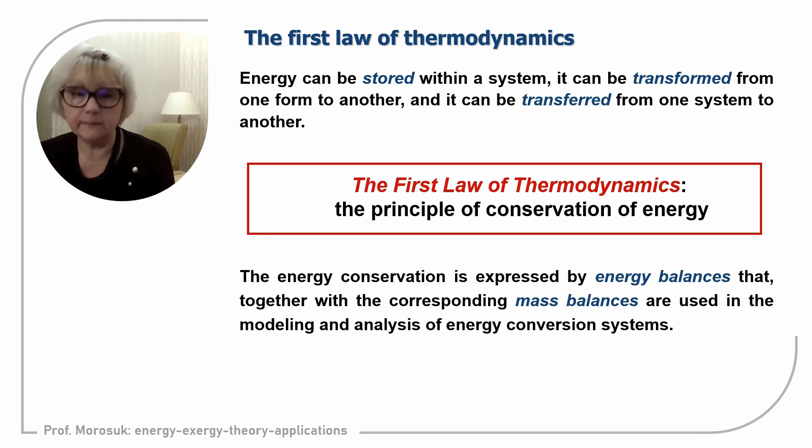In the previous lecture, we already covered energy balance for the open system. Now we will discuss the energy balance for the closed system. For engineering thermodynamics, the closed system is associated for us with the cycle. And we already discussed the definition of cycle. If a system goes from one initial state through a series of processes and returns to the same state, we have a cycle. And depending on the direction of the processes, all cycles are divided into two big categories: direct cycles and inverse cycles.

And the word direct or inverse is mainly associated with the direction of the cycle in thermodynamic diagrams. For example, here we have the TS thermodynamic diagram. And for the mass balance of the closed cycle, mass is constant because according to the definition of closed system, matter, so working fluid, cannot cross the system boundary.

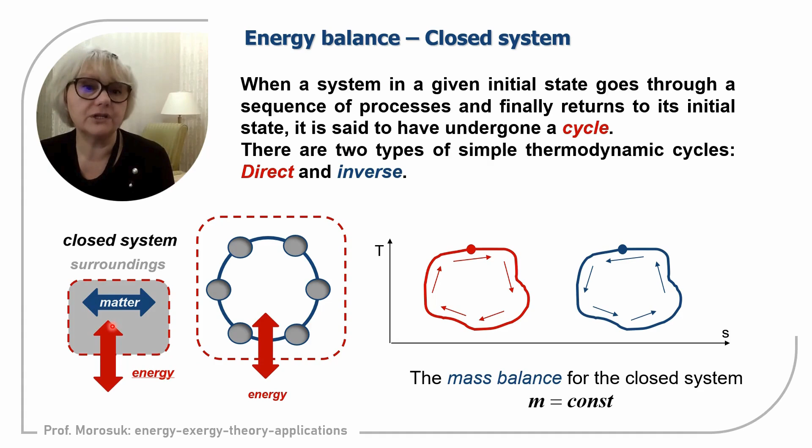According to the energy balance of the closed system, so it is a cycle, if the system returns to its initial state after passing a set of processes, the net change in energy is equal to 0. So it means that the balance is written like that: work of the cycle plus heat of the cycle is equal to 0. So it is a well-known equation. Now let us discuss each term.

What does work of the cycle mean? Work of the cycle is the sum of all works supplied to the cycle and rejected from the cycle, or better to say work applied to the cycle and work produced within the cycle. Similarly, we can discuss heat of the cycle: all heat transfers to the cycle minus all heat transfers from the cycle. And we can show it graphically.

So let us assume that we have a cumulative stream of all work supplied, all works produced, all heat. Heat or heat rates, or instead of work we can also say power, does not matter now. For us both are okay, and all heat transferred through the system boundary. If we are absolutely precise with thermodynamic terminology, of course, it will be energy transfer in form of work and energy transfer in form of thermal energy.

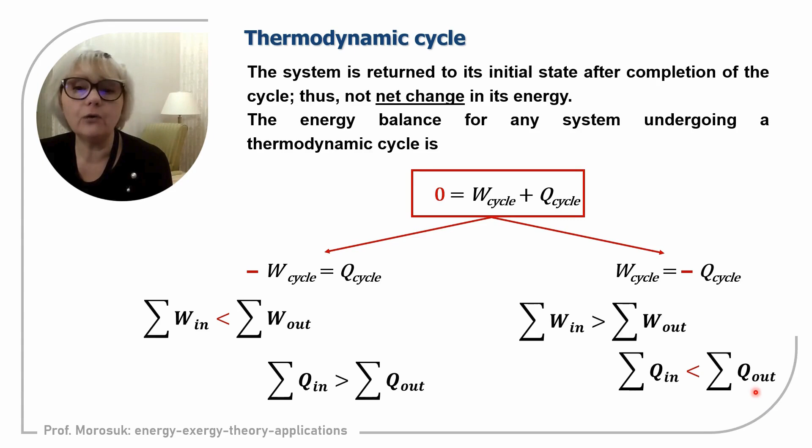This is the first case. In the second case, work supplied is higher than work produced by the cycle or removed from the cycle, but we have minus heat, energy in form of thermal energy. Heat supplied is less than heat rejected. So now, how will it affect the configuration of cycles and the analysis of the cycles?

Again, the same equation. If work of the cycle is negative, as we already agreed, according to the European rule, energy transfer coming from the system means that it is produced within the system. So work is negative means that within the system, work is produced. And this is the effect of the closed cycle. But heat of the cycle is positive.

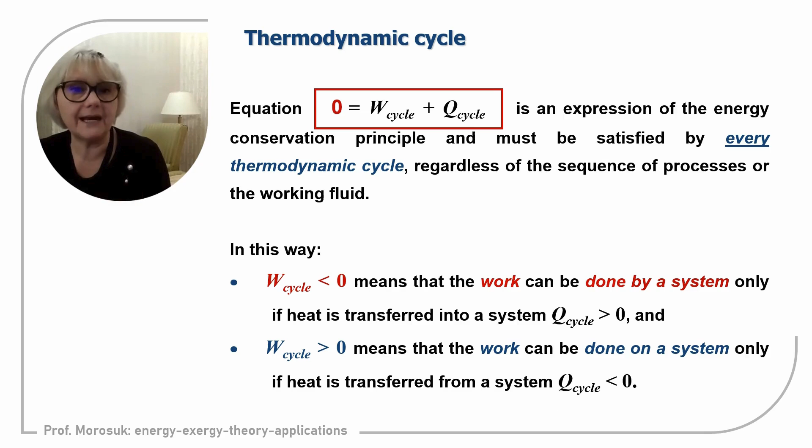If work of the cycle is positive, it means that for the realization of the cycle, work should be supplied. Maybe something is also produced, but nevertheless the work supplied will be higher than the work produced by the cycle and removed from the cycle. And heat of the cycle is negative. It means that we will supply less heat than we will reject from the cycle.

Let us remember the 4 blocks when we discussed engineering. We had energy transfer, working substances, thermal design, after that engineering design and operation. Now we will discuss thermodynamic cycles. Operation and engineering design are not interesting for us because it's only the thermodynamic concept of the cycle, and at present working substances or working fluids are also not included in the discussion. So thermal design and all our thermodynamic discussions will be limited only to the block energy.

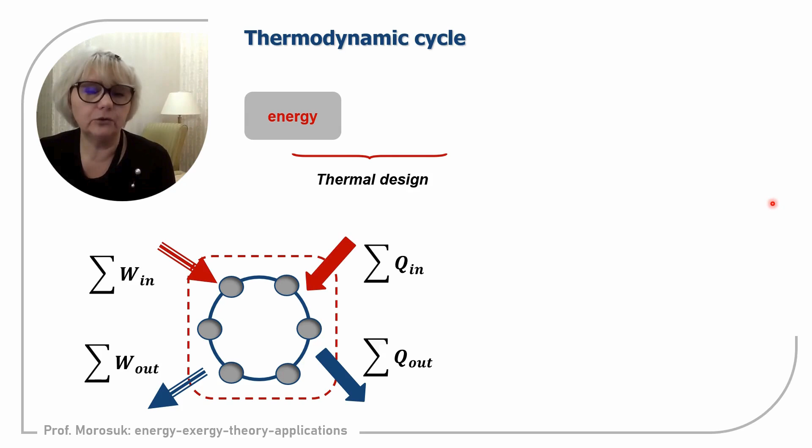So now the only interest for us is how heat is supplied to the cycle and rejected from the cycle, work supplied and work rejected, meaning work produced within the cycle. Work is more or less clear for us because work is only work, and there are no other categories that should be discussed behind the work. But heat is always associated with transfer of thermal energy. For heat we need not only the amount of heat but also the temperature level at which heat transfer is taking place.

And in thermodynamics, there is a concept of thermal reservoir. It is an absolutely theoretical concept. In real life, thermal reservoirs don't exist. And we need to introduce this concept for thermodynamic analysis of the cycle. So a thermal reservoir is a special kind of hypothetical closed thermodynamic system.

And what do we know about a thermal reservoir? The temperature of a thermal reservoir is always constant, regardless how much energy we take from this reservoir or how much energy we reject to this reservoir. It will not affect the temperature. Temperature always will be constant. It means that this thermal reservoir is of huge size.

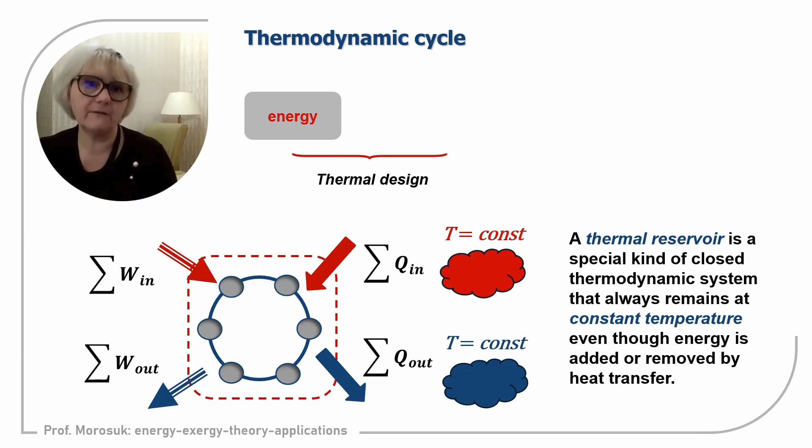So we will discuss two thermal reservoirs. One in red color always will be associated for us with higher temperature, and blue color will be associated with lower temperature. Here I would like to bring your attention. We will not discuss hot reservoir or cold reservoir. We always will discuss only relatively hotter and colder. This is very important for us. So now we will deal with thermal reservoirs.

The only thermal reservoir that is more or less close to real life, and we can understand what it is, is the environment. Many years ago, people assumed that regardless how much energy we reject to or take from the environment, its temperature will always be constant. After the Paris Agreement and all these environmental issues, we know that unfortunately the temperature of the real environment, which is called surroundings in thermodynamics, is not constant and is continuously growing. So even the surroundings cannot be assumed to be an ideal thermal reservoir. Okay, this is real application, and now we will return to thermodynamic analysis.

Let us assume that we have a thermodynamic closed system. Temperature of this system is constant, and this temperature will be the temperature of the environment. From the beginning, for the temperature of the environment we will use the nomenclature T0. That will be very helpful when we move to exergy analysis. Everything which is related to environmental conditions will have subscript 0.

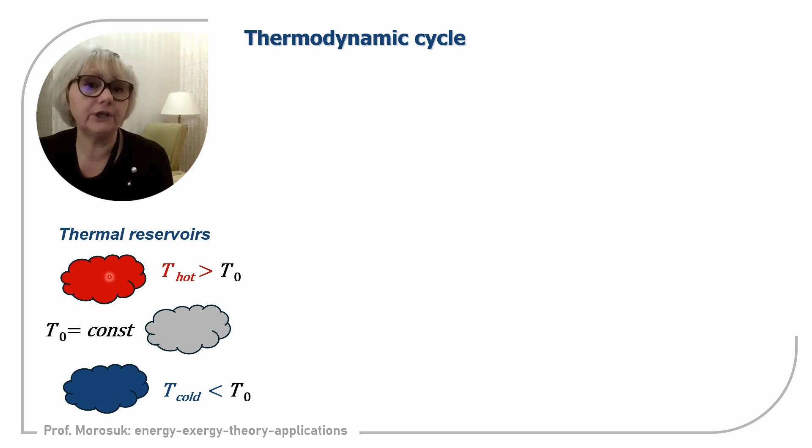It means that we will have one hotter reservoir with temperature higher than environmental temperature, and one reservoir with temperature lower than environmental temperature, the colder reservoir. But since we are already dealing with environmental conditions, we can really say that the red reservoir is hot and the blue reservoir is cold. Here we can already use absolute definitions. And now we have three temperature levels: environmental, hot, higher than environment, and cold, lower than environment.

And we can have the following energy transfer. We can have thermal energy transfer from a higher temperature level to a lower one, and the lower will be the environment. We will produce work and realize a direct thermodynamic cycle. And we have two possibilities to transfer thermal energy from the lower temperature level, even if it is the environment, to the higher temperature level. Work should be supplied, and this will be realized within an inverse thermodynamic cycle. So for thermodynamic analysis we have one direct thermodynamic cycle and two inverse thermodynamic cycles, operating between different temperatures.

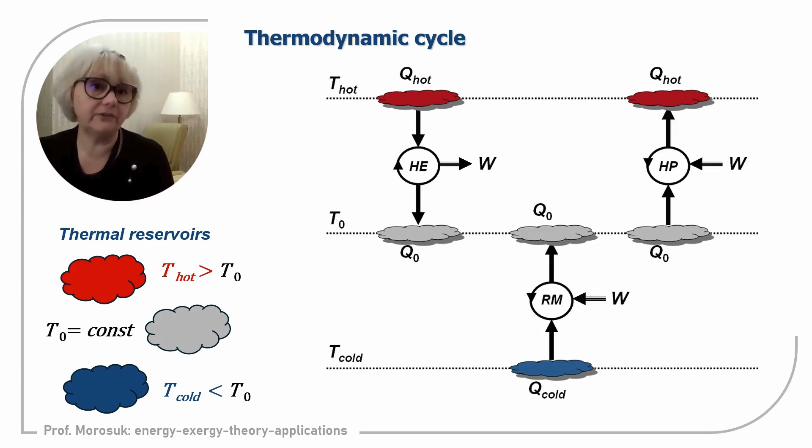The first cycle, the first thermodynamic schematic. When we have heat transfer from the hotter temperature level to the colder temperature level, it's called a heat engine. So heat engine is the thermodynamic term for the closed thermodynamic system where a direct thermodynamic cycle is realized, and therefore we have work produced that can be transferred from the system to the surroundings.

We already discussed all these equations, and for a direct thermodynamic cycle, work has a negative sign, meaning work is produced and transferred from system to surroundings, and heat is positive, meaning that heat supplied is higher than heat rejected to the environment. So heat supplied is the higher value, heat rejected the lower value, and the difference between these two values is the work produced by the cycle.

The rate between work produced and heat rejected to the environment is already a matter of discussion of which cycle exactly realizes it and also which working fluid will be used. At present, it is not important for us. We're discussing only the thermodynamic concept.

And I would like to bring your attention that direct cycle and power cycle are synonyms. Some authors prefer to write direct cycle, some authors prefer to write power cycle. Direct cycle is mainly a thermodynamic term. Power cycles, of course, should be plural because we have many cycles. It is already for engineering application.

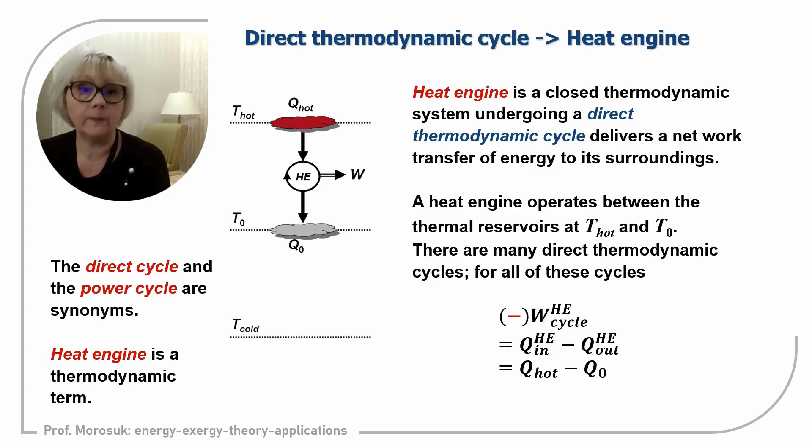Two inverse thermodynamic cycles. For both cycles, regardless if one cycle operates between a temperature below the environment and environmental temperature, or the other cycle operates between environmental temperature and a higher temperature, both are inverse cycles and the following set of equations will be valid. Work of the cycle is positive, meaning that work should be supplied to the cycle, and heat of the cycle is negative. It means that we will supply to the cycle less heat than we will reject from the cycle.

And we have two terms and also engineering systems that operate according to the inverse thermodynamic cycle. The first is called refrigeration machine, between temperature below the environment and environmental temperature, and heat pump, between temperature of the environment and a higher temperature.

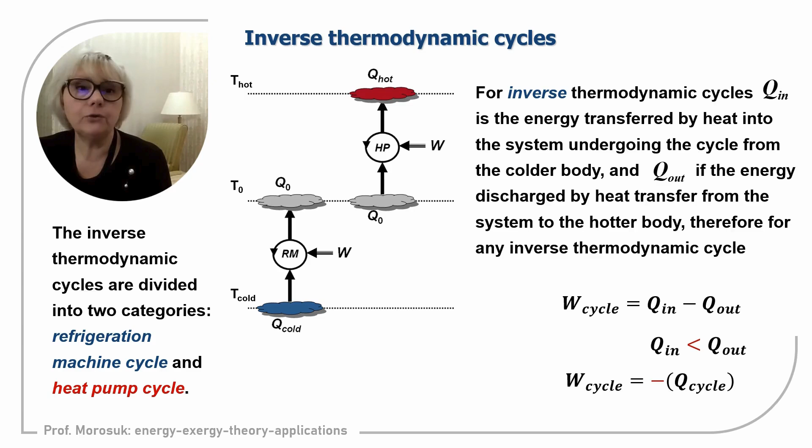Refrigeration machine and heat pump, I repeat, are together a thermodynamic concept but also a technical unit. So if we would like to buy a refrigeration machine, we have a lot of offers. Many companies over the world can offer us refrigeration machines, different design, different type, different working fluid, but everything will be called refrigeration machine. And the same will be for heat pumps. So let us continue our discussion with the cycles.

Let us look a little bit deeper at inverse thermodynamic cycles to avoid any misunderstanding in the future when we discuss refrigeration machines. We can see that for a refrigeration machine, heat from the lower temperature level is transferred to the higher temperature level. So incoming heat is lower than outgoing heat, and outgoing heat rejected to the environment is the sum of incoming heat, which in these terms is refrigeration capacity, and work supplied to the cycle.

In a heat pump, we have a similar equation. Work is supplied to the cycle, heat is taken from the lower temperature level, which is the environment, and transferred to the higher temperature level. So the amount of heat transferred to the higher temperature level is the amount of heat that we take from the environment plus work.

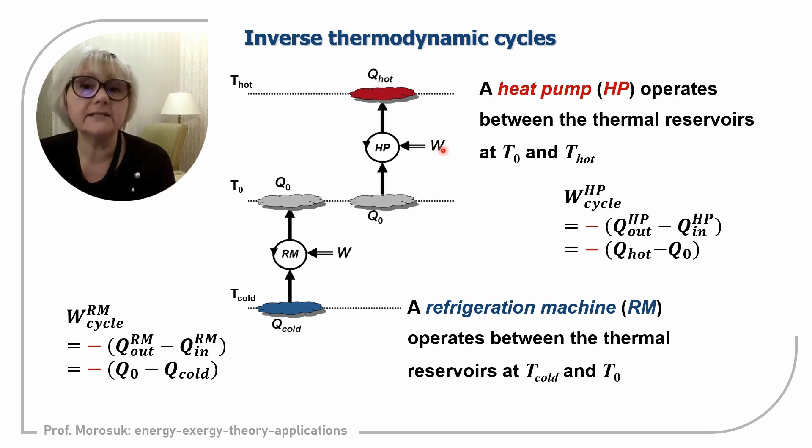Now we are reaching the topic of efficiency, but I would like to start this topic from the previous definition. So let us start from the very beginning. We have the word performance, and we know what performance means. We know the linguistic meaning, and we know the application of the word performance in our everyday life. When we say performance, we don't need to give a numerical value.

Performance can be of students, for example, it can be economic performance, environmental performance. So the word performance has a very wide spectrum of applications. But we need to apply the word performance in thermodynamics and give a technical meaning for this word. So let us start from the beginning.

What does performance mean? Performance, if we would like to calculate this value, will be the positive effect that the system will generate over the driving resources that we need to spend in order to generate this effect. Definitely, if we are discussing in terms of energy, the positive effect should be in energy form. It can be heat or work, and driving energy also should be in energy terms, as work or heat.

So it means that if we have an energy conversion system, among all energy streams coming into the system and going out from the system, we always should find the streams associated with the positive effect and with the driving energy of this system. So regardless if it is a direct thermodynamic cycle or an inverse thermodynamic cycle, the principle will be absolutely the same.

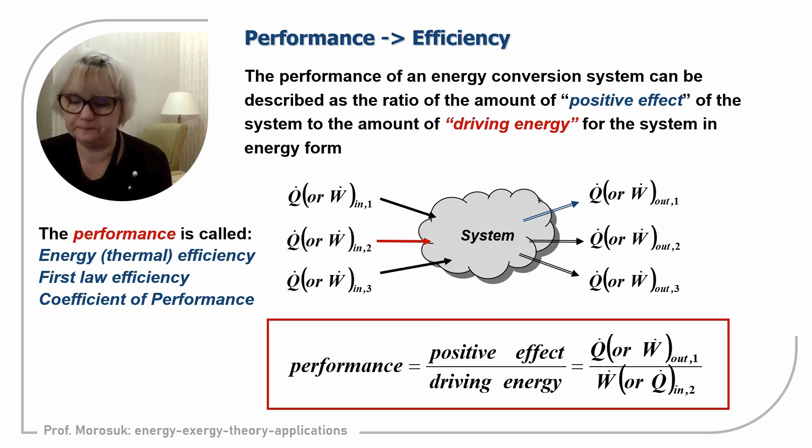Performance is called energy or thermal efficiency for heat engines, meaning for all energy conversion systems that operate according to the direct thermodynamic cycle. Energy efficiency is always in the limit between 0 and 1. Definitely it never can be 1. Coefficient of performance is also energy efficiency. That term is used for refrigeration machines and for heat pumps, so for energy conversion systems that operate according to inverse thermodynamic cycles.

Now the question: why for heat engines, for the direct cycle, do we have one nomenclature, and for inverse cycles another nomenclature? We don't even have a Greek letter for that. We have a simple combination of 3 words, coefficient of performance. The answer is very simple: thermal efficiency is always between 0 and 1, and coefficient of performance for a refrigeration machine varies between 0 and infinity, and for heat pumps between 1 and infinity. So this is in order to avoid any problems with the understanding of the term.

And for very complex systems where both direct and inverse cycles are involved, and we will also discuss such systems, we will mainly use the term coefficient of performance, because this value can be higher than 1. And as I mentioned already, the term first law efficiency can also be very popular. At this moment, first law efficiency has no other nomenclature, and the nomenclature from the 2 cases we already covered can be used.

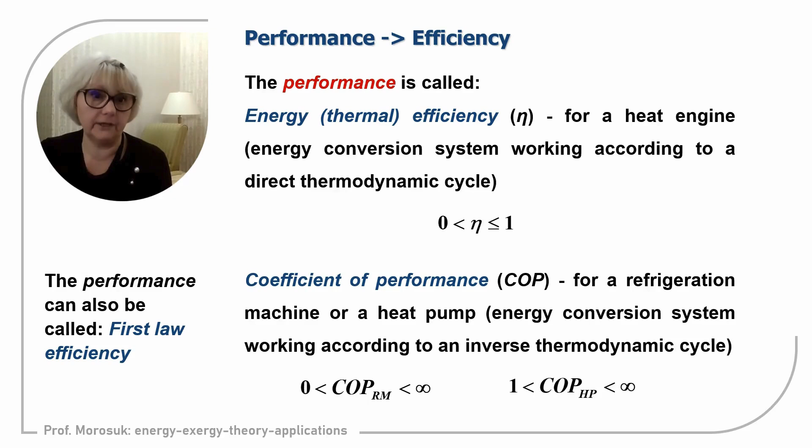When we discuss energy efficiency and cycle efficiency for 3 thermodynamic systems, we already know how to calculate these values. But now, please pay attention. During our discussions, I never mentioned the working fluid that should be used. The topic of working fluids is not included. Definitely, a working fluid should exist within the cycle, but properties of working fluids are not included in our discussion. We did not discuss which processes form the cycle, or even the number of processes, whether it is 3 processes, 4, 5, or even more. It was irrelevant for us. This topic was not included.

And the last topic that was not included: we did not discuss if each process is theoretical, ideal, or real. That was also not included. So it means that when we discuss energy efficiency or coefficient of performance, these three categories, working fluid, which processes and how many processes form the cycle, and if the cycle is real, theoretical or ideal, are not included, because we discussed only the entire system: energy in, energy out, work supplied, but we did not discuss thermodynamic processes within components.

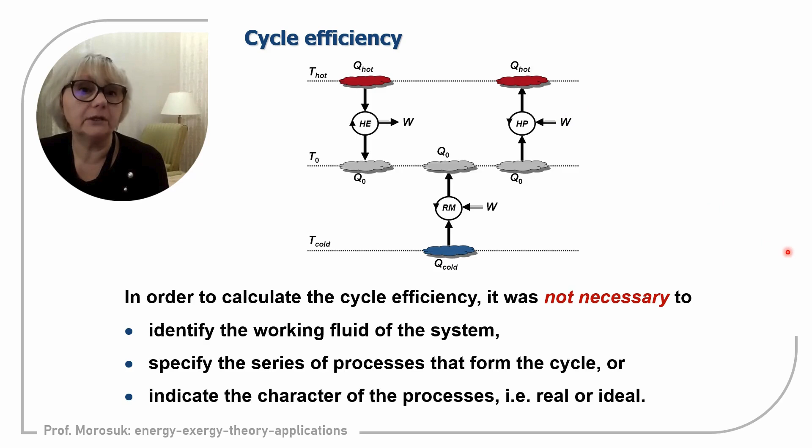Now, to make our discussions clear, one more time I will repeat that efficiency of the heat engine is work produced by the cycle divided by heat supplied to the cycle, because the driving energy is heat supplied to the cycle. It is not the difference between heat in and heat out. No, only heat supplied to the cycle is the driving energy, because if this heat is not supplied to the cycle, the cycle will not work. We will have no driving energy. And the positive effect of the cycle is work produced by the cycle.

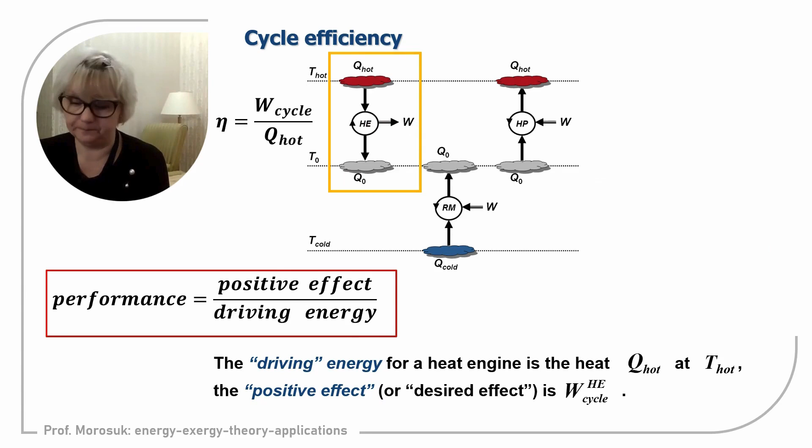Similarly, we have the refrigeration machine, but for the refrigeration machine the positive effect is refrigeration capacity, and the driving energy is work supplied to the cycle. For the refrigeration machine we have a unique case where the positive effect is heat transfer to the system, so incoming energy transfer to the system is already the positive effect of the cycle, but it is a unique case, as I already mentioned. And COP of the cycle is refrigeration capacity over work of the cycle.

A similar equation we can write for the heat pump, but in a heat pump, the positive effect is heat produced at a high temperature level. So for a heat pump, the positive effect is the energy stream going out from the system to the higher temperature level, and work is supplied to the system, because we're discussing an inverse thermodynamic cycle.

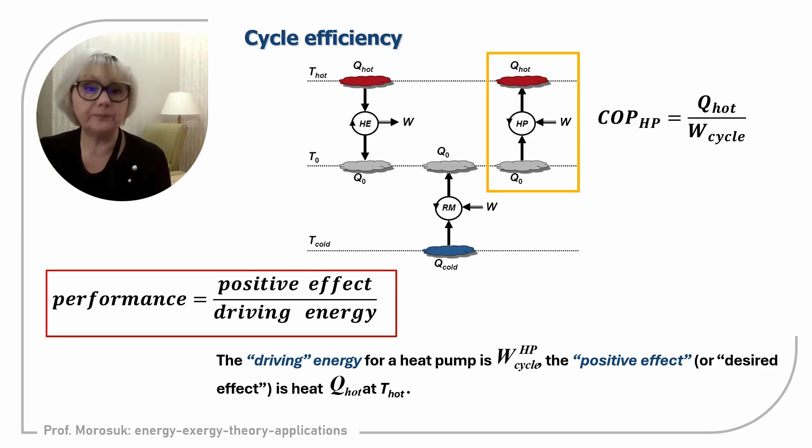Our next lecture, lecture 4, will be dedicated to the second law of thermodynamics and the concept of irreversibilities.